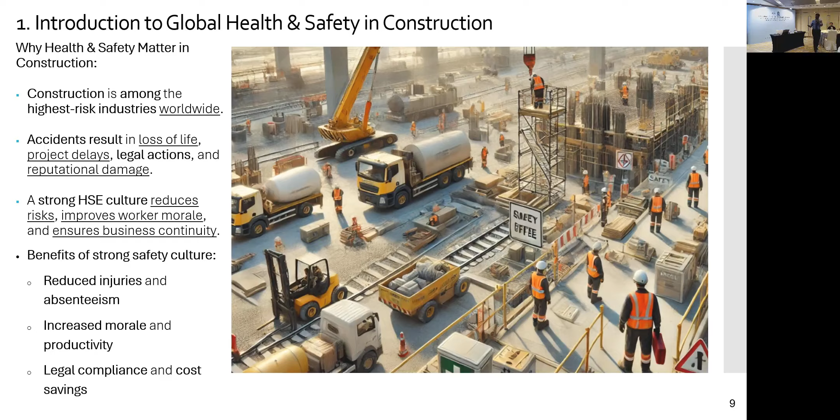Now let's look into when we talk about - there are some things when we talk about what is construction, and all of you are construction experts, so I don't have to go in deeper. As I said, construction is actually a process - it can be building, assembling, or even repairing.

Repairing means you do restructuring, maybe due to inspection failure. You need to do some rework, restructuring, and so on, which is for infrastructure such as building, road, bridge, factories, and others.

Highways and others. Now the characteristic is very important, right? It involves physical work, which is manual and mechanic, mechanized work. Now second, it also requires resources.

Now you have the material, but do you think labor is very important for you? The training on the labor is important. In some areas we hire foreign workers. We know they've been working in the construction industry, so we assume they know what they are doing.

They think that is risky, right? So do you provide any induction training for the area they are going to be involved in? Construction job is not a single area, like manufacturing. It's different.

Construction is different because you have a number of different processes, and each and every process needs special skill. Agree with me? So when you talk about skill...

In the past he had been plastering, yes he had been plastering. But does he know the mixture of the plastering? Who prepared the mixture of plastering? Is it he mixed and he plastered, or someone mixed and he plastered? He is good in plastering, but it doesn't mean he's good in mixing.

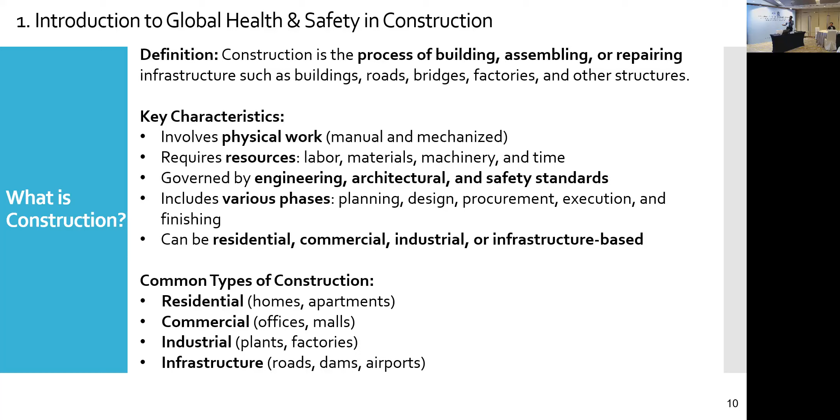And the common type is these, which is for residential needs, for apartments and others. So these are some examples.

And now we move into project. So you have your construction, we move into project. When we talk about project, the definition is: a project is a temporary endeavor which is undertaken to create a unique product, or it can be a result at the end of what you are expecting, with defined objectives, timelines, and so on.

Now the characteristic is that it should start and end, because any project always starts and ends. Today's training starts at 9, the end will be at 12. Is that correct? So any project is starting and ending. And if the ending is delayed, that impacts you. If the ending is on time, that gives you a good completion success rate, plus you don't have any loss.

And after you complete the project, you still give warranty. Remember, during that warranty, if there is no incident, no cracks, broken parts, or whatever, you are not going to send your worker for additional jobs. I mean, you save time, you save your cost, you save your profit.

Now, so next, for any project, you will define your scope and deliverables, and also manage through scope, time, quality, and so on, which requires coordination across teams. When we talk about a project, it's not that your company takes the project and uses its own workers to run the project, agree with me?

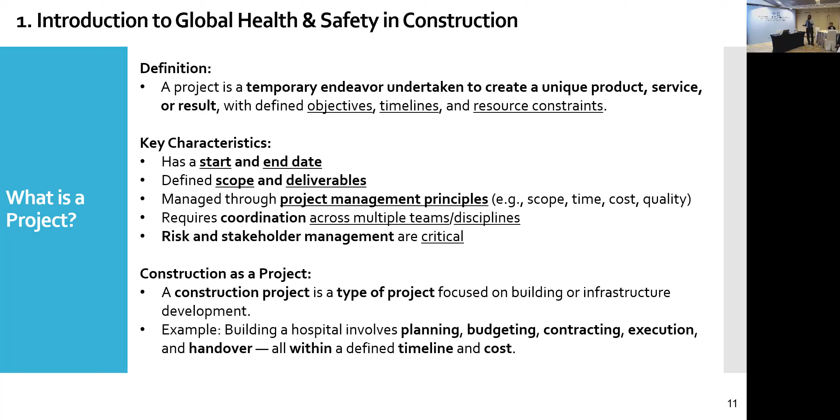Now, these are some breakdowns you can see. When we talk about health and safety, the type of project can be residential, commercial, and so on. When we talk about residential, the focus will be on living space and so on. You're familiar with this - I'm just giving some guide.

But important is, when we talk about any of this project - let's say it's infrastructure, highway, bridges or tunnel - there will be heavy civil work compared to residential or other types. Now, each of you as a construction company, your scope is different. You can be a highway builder, or construction for another industry.

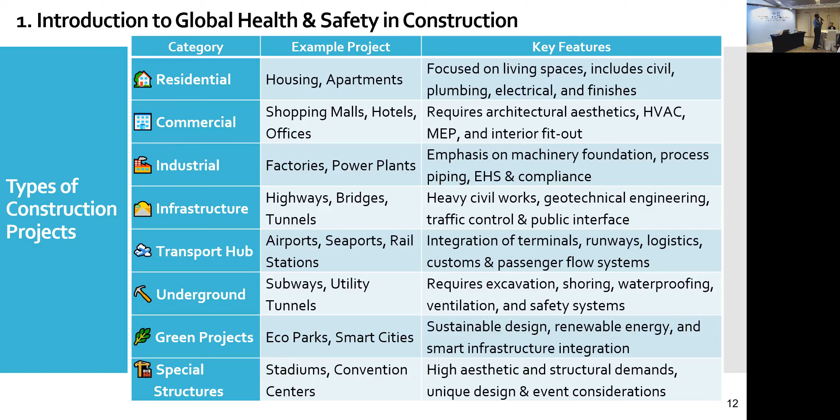Am I right? So your scope is actually very important. The scope will determine which area you are expert in, and in that area you need to make sure your key features for health and safety are well equipped. For example, in Malaysia now many are going into Eco Park, smart city and others too. Now the design should focus differently - here it's sustainable design. If we talk about highway, the design can be different. So the design is actually based on the output you're looking for, and when planning for that, the safety aspect needs to be considered first.

Now, also if you look into a specific example - bridges and construction, structural links over water and also land for transport involved, which is civil structure and other. Now, when we build some project, let's say it's a hill project...

We had an earlier incident in Malaysia where Highland Towers actually collapsed. Remember, some time ago? What happened was the water retention actually caused the whole thing to collapse. That was many years back.

So now we start the project and we give them the warranty. How long is the warranty? Normally in your project, how long is your warranty for the projects? One year. But the water retention damage will come after maybe 15 to 20 years.

Okay. Exactly, that's important, am I right? So that means we call lifetime warranty. So the warranty is for the repair work, is that correct? Which is for the 1 year.

Yeah, correct. But let's say, for example, now in Malaysia solar is actually becoming popular. I fixed solar in my home also, of course for energy efficiency. And I'm just paying now only 10% of the electricity.

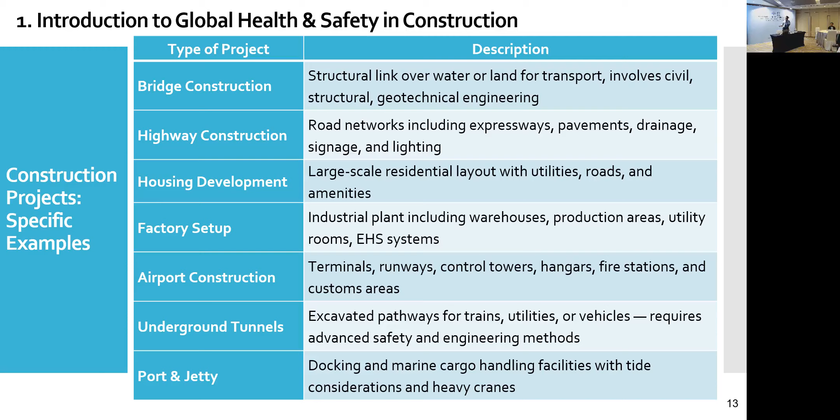So these are some examples, which you can see in highway construction or housing or even factory setup. Malaysia now has a lot of factory setups. So when factory setup, the factory can be ready in a short time or a long time, but it still depends on the warranty that you give, the safety that you build into the construction, plus the worker itself. It can be a tunnel, it can be any other port or jetty or whatever.

So the description is this, and let's look into health and safety, which is the relationship between construction and project. Based on the input I've given, now you have a good overview, which is now discipline focus. When we talk about construction, the focus is on building. When we talk about project, of course, it's managing the task. So I've given the blueprint, I provide the structure, how we should go about it. Now you need to get in what machinery equipment, because the design never gives you what machinery you need to bring in. So that means the resources you bring in for the next level of task is very important.

For how many stories of building? What machinery do I need to bring? What local requirements and approvals do I need to get? All that needs to be planned well.

Let's talk about construction work, which is one phase in a project. But when we talk about a project, there should be planning, then budgeting, execution, and once you execute, there's rework and other activity. Actually, the project is more tedious compared to just the construction.

So these are some relationships. Now, results - construction is actually an infrastructure, and your project is the result of your deliverable. After my project hits, how many of the projects succeed on time and incident free, and how much is the user satisfaction? Is that important when we do construction?

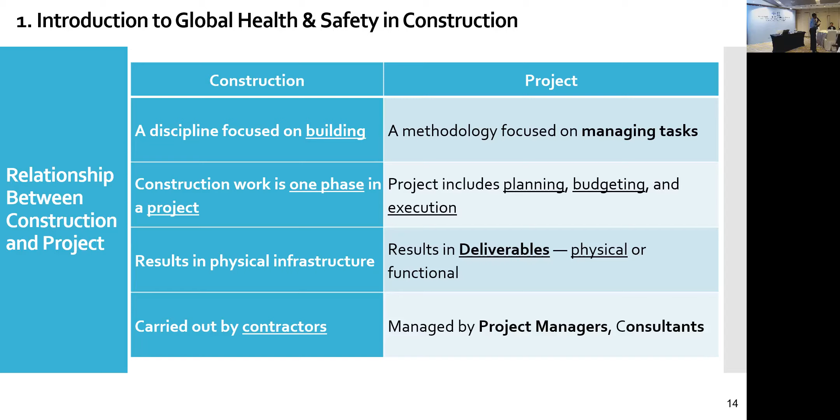And do you think there can be some fake documents? How do you ensure the fake documents are properly checked? You need to train, you need to educate - that is actually very important.

Now let's look into the importance of health and safety in construction, and also an overview of the global standards and so on. The construction industry, as I mentioned, is a high hazard or hazard-prone sector globally. Always you have a lot of disruption when you go into your project, so you have a disproportionate number of workplace injuries.

Of course, the first thing is when you start a project, before the contractor takes over any small project or big project, do you have any requirement to collect information from their past experience? Do you check their background, their experience, and whether any incident happened? Do you do that? Do you document that? Is that in your criteria?

Remember, why am I saying criteria? That means your SOPs - standard operating procedures. When we talk about selection of any contractor, you may have a standard operating procedure. What does your standard operating procedure say? Is there a criteria to be fulfilled?

If let's say you found some of the criteria not fulfilled, what do you think you will do? I don't have any other contractor that I can use for the project, but this guy is not complying with certain areas - what will you do?